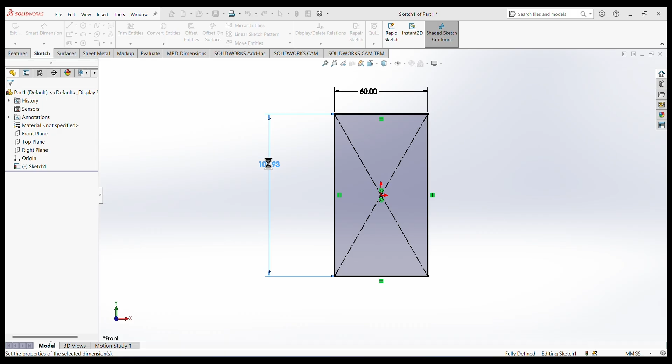Then assign the dimensions. This one is 60, enter. This one is 90, enter. Now we create the circles, two circles, and then assign the dimensions. First one is 30 millimeter dia, second one is 60 millimeter dia, enter.

Now we create the keyway. First we select the line and then create a random keyway just like this one. Okay, select. Now we assign the dimensions. First we make it horizontal. Okay, now we assign the dimensions. This is 8 millimeter, enter here. Okay, now we make it exact on the same axis.

Assign 0 dimension, enter. Okay, now the mid of this line and this center is exactly on the same axis. Now we assign the next dimension: from this point to this one is exactly 18 millimeter. Enter here. Okay. Now our keyway is ready. Now we can trim the remaining part. Okay.

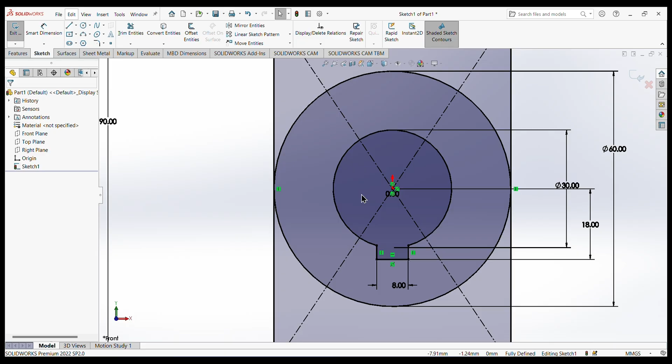Now look here. Our whole sketch is ready. Now we assign the extrude command and then extrude this face, and the dimension is 30 millimeter. Enter here. Okay. Now look here.

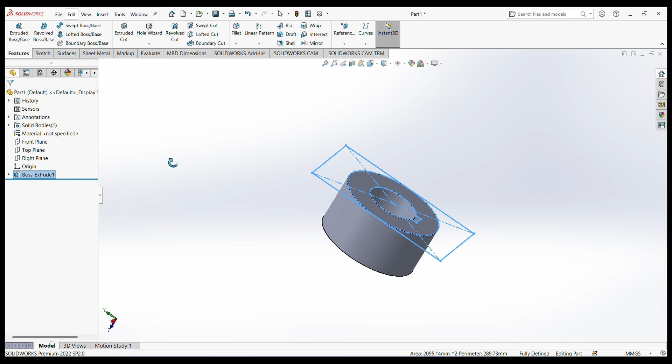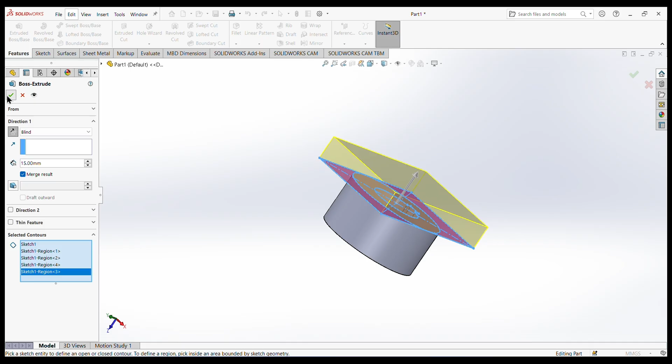Okay. Now we can make the extrude rectangle sketch. Select the sketch, extrude, reverse direction, assign the dimension 15 millimeter. Enter here. Also select this face and this one millimeter. Okay. Now look here. Our bottom part is ready.

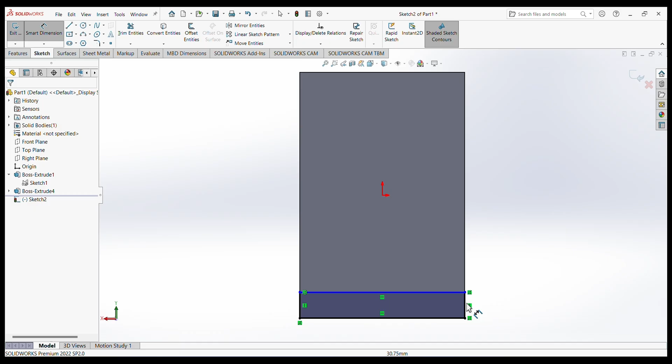Now we are going forward and select this one for sketch. Okay. Now we create a line from this one to this one. Make full rectangle. Okay. Now we assign the dimensions. This one is 15 millimeter. Okay. And this one is 60.

Okay. Now we assign the extrude command. Okay. And how many? That is 43. 43. Enter here. Okay.

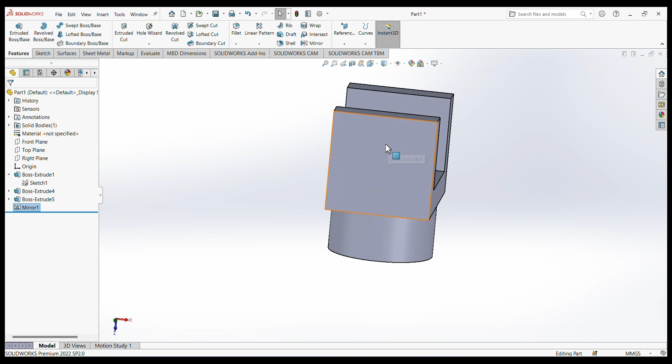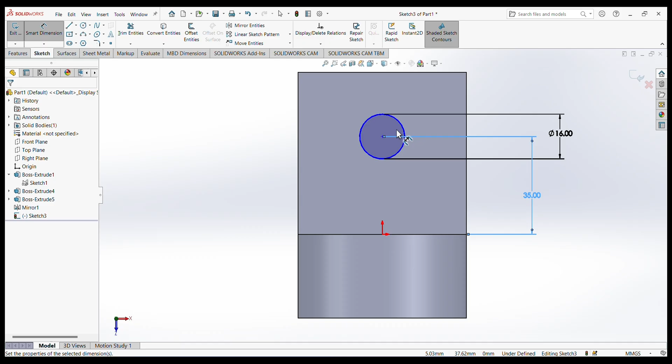Okay. Now simply going to the SolidWorks page and then ready for sketch. Make the hole. Okay. Assign the dimensions: 16 millimeter dia, and from this point to this one is 35. Enter. Okay. Now going to feature extrude cut command, going to through all both. Okay. Now look here. The hole is ready.

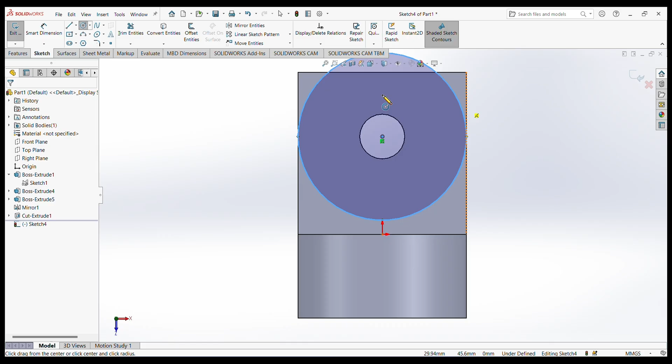Now we can go again for sketch and then make the circle again at the center of this point, this circle, sorry. Okay. Assign the dimension. This circle is exactly 23 radius and then 46 is the dia.

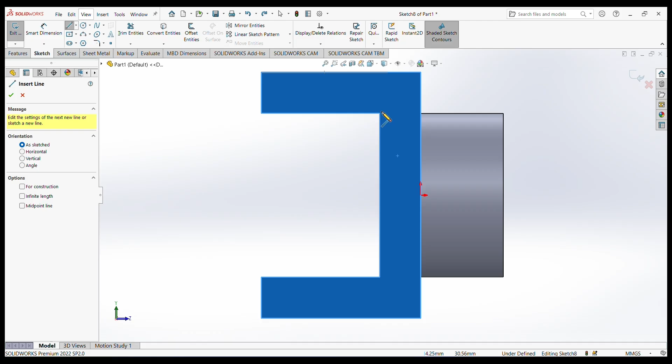Okay, select. Now select this face for sketch. We can use this top plane for sketch. Select this face for sketch. Okay, now we make the line again from this point to this one.

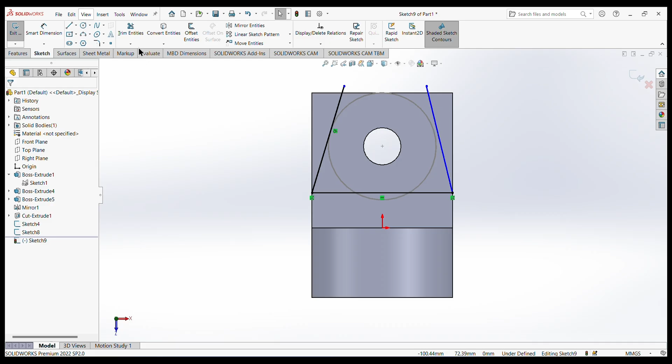Select line from this point to randomly this one. Okay, then create the tangent of this line to this circle. Now look here, tangent. Okay, now simply we are going to features, use extrude cut command, select this face, this area, this, and also this one. Okay, now look here, through all both. Okay.

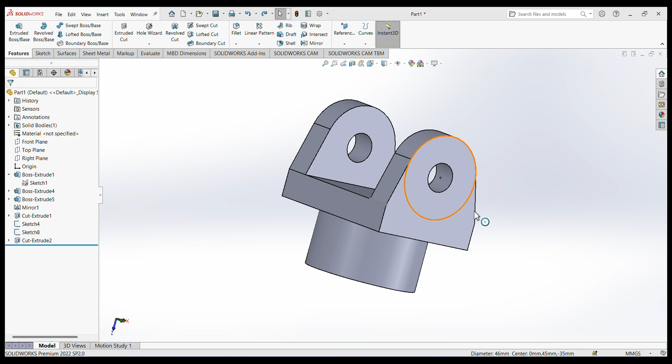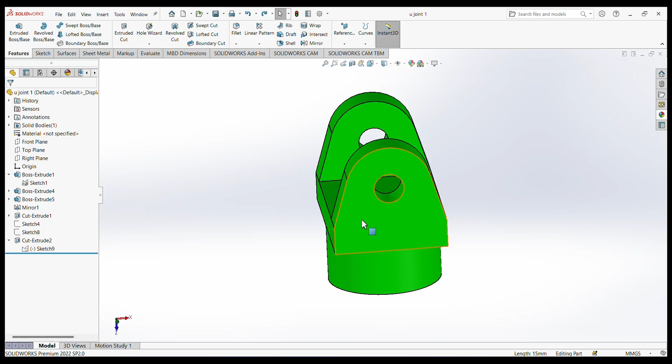And then assign the color as you want, just like green color. Okay, now we can go to save it, save as, assign the U joint 1, enter. Okay, now we are going to the next part, and that is number 2, bearing cross. Now the bearing cross is this one.

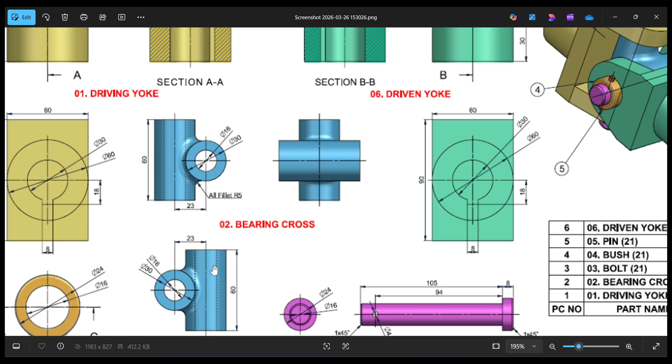We are going to the SolidWorks page, create new file, part. Okay, now select the front plane for sketch, create the circles, 2 circles, and then assign the dimensions.

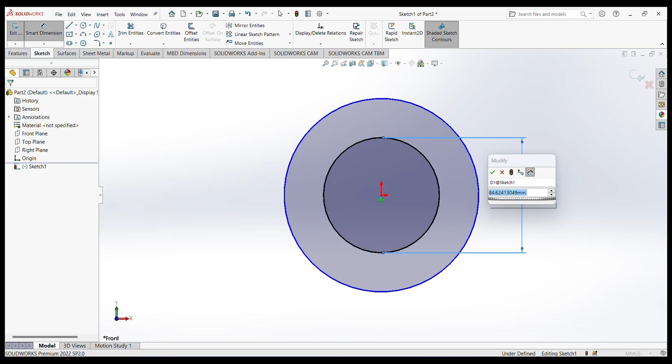This one is 16 millimeter dia, enter. This one is 30 millimeter dia, enter. Okay, now we assign the extrusion, that is 60 millimeter, enter. Okay, now the one bearing is ready.

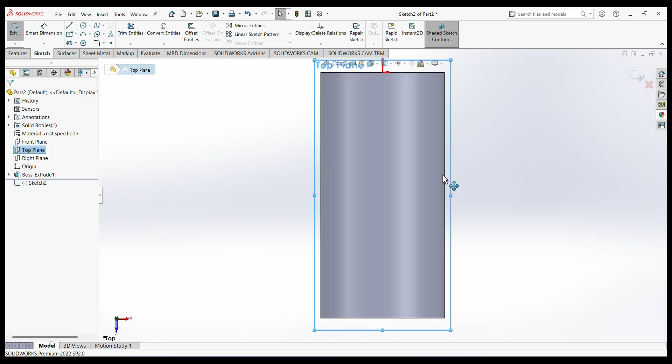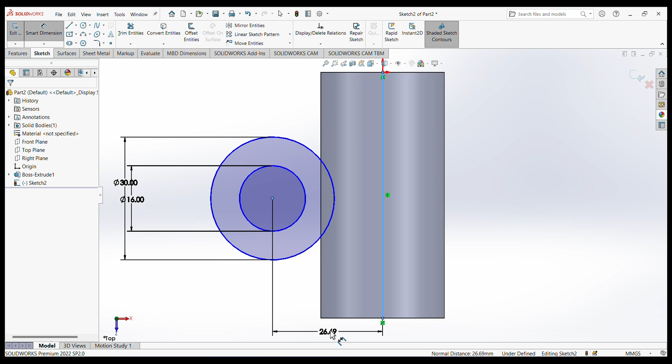Now we select the top plane for sketch. Okay, now we create the circle at this point randomly, make 2 circles, and then assign the dimension. This one is 16, enter. This one is 30, enter. Okay, now we assign the dimension from this center to this center line. First we create the line that passes to the axis of the origin of this bearing. Okay, now we create the dimension from this point to this line is exact 23, enter.

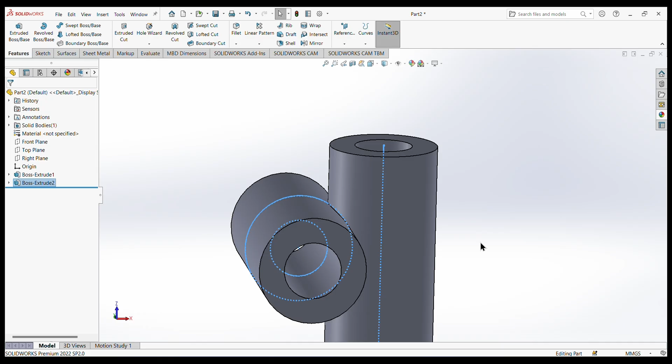Okay students, now look here. Now we are going to the feature, use extrude boss command and assign the dimension and make it mid plane. Okay, now look here, our bearing is ready. Now we are just applying the fillet, going to fillet command and select this option, select this edge and then assign the radius 5. Okay, now look here, the bearing is ready.

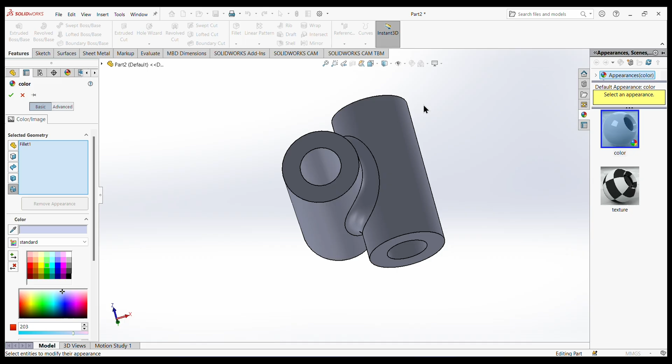Okay students, now we are just going to assign the color just like this one. Now look here, if you assign this one, I think this one is better. Okay students, this is our bearing cross. Now we can save it, save as U joint 2, enter.

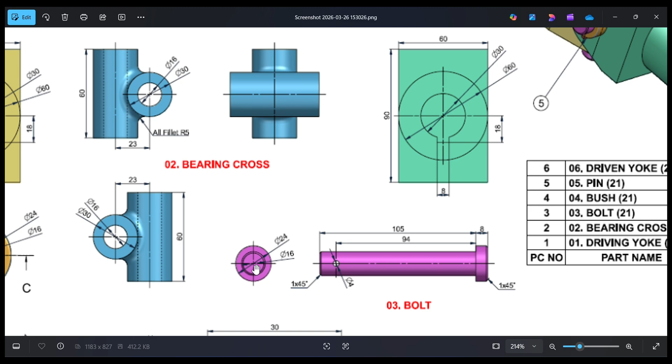Now we are going to the next part, and the third one is bolt. If you look here, the bolt, its dimension is, the head of bolt is 8 millimeter, the tail of bolt is 105 millimeter length. Now if you look here, there is the circle on the tail that is 4 millimeter dia, and the chamfer on both ends that is 1 cross 45-degree angle. If you look, the circle of the head of the bolt is 24 millimeter dia and the tail circle diameter is 16 millimeter dia. Now we are simply going to the SolidWorks page and create new file, part.

Okay. Now first we create the sketch, front plane, ready for sketch, select the circle. Okay. Again circle, create. Okay. Now we are going to the dimensions. This one is 16, this one is 24. Enter. Okay. Now we assign the extrusion. This one is 105. Enter. Not using the mid plane. This is blind. Okay.

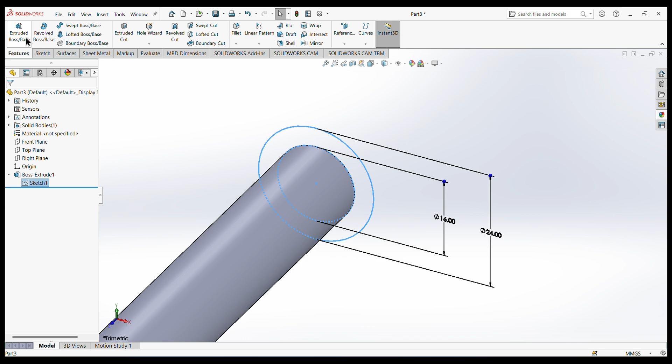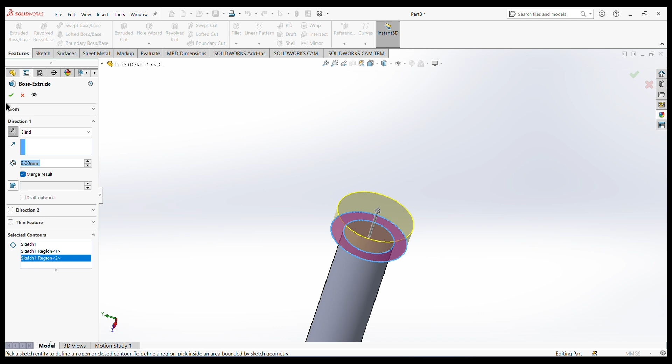And select the sketch. Extrude again. Select, use the reverse direction and select the selected contours. This one. Also this one. Okay. And the dimension is 8. Enter. Okay. Now look here, the bolt is ready.

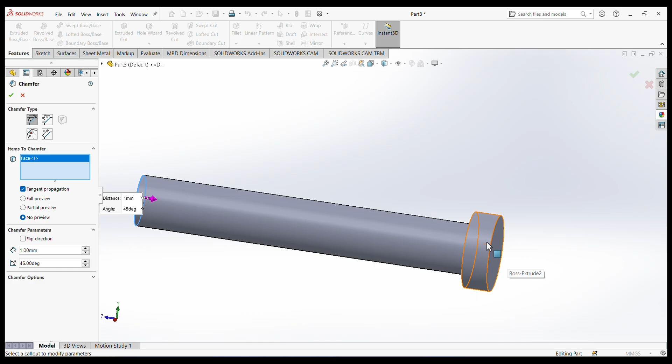Just assign the chamfer, chamfer command and then select the distance and angle. Distance is 1 millimeter and the angle is 45. Okay, select the edge, this one and this one. Okay, now look here, the chamfer is also ready.

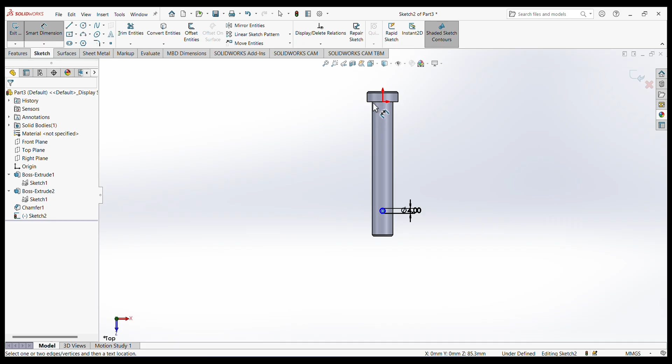Now we are going to the top plane sketch. Okay, create the circle. Okay, assign the dimension 4 millimeter dia. Enter. And then from this point to this one is 94. Enter. Okay, now we are simply going to feature extrude cut and select the through all both. Okay, now look here, our hole is ready.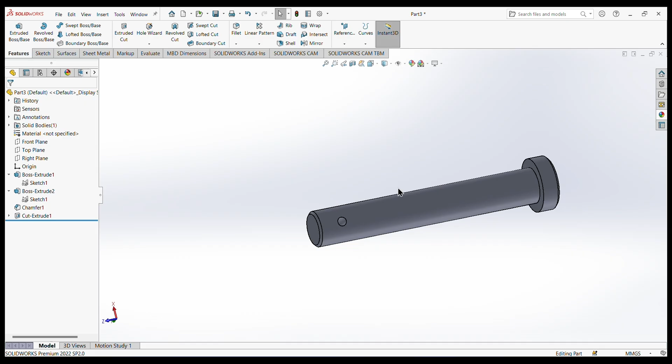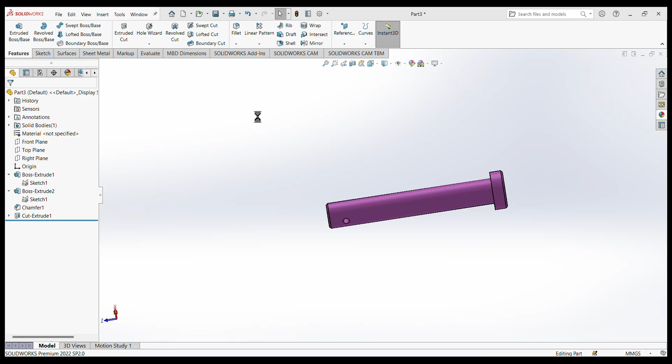Now we simply assign the color. Now select the whole bolt and assign the color. Just like this one or this one. Which one is better? I think this one is better. Okay, now we can save it, save as U joint 3, enter. Okay, now we are going to the next part, and the fourth one is bush.

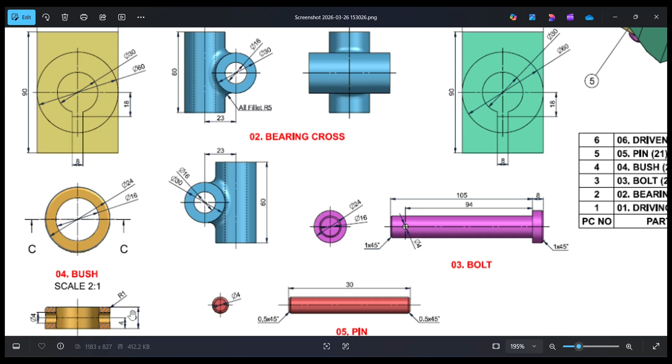If you look here, the bush dimension, that is two circles. First one is 16 millimeter dia and the next one is 24. And then if you look here, the section view of this bush, there is the hole of 4 millimeter dia that is made inside the bush, and the dimension of the center of this hole to the end of the bush is 4 millimeter and the total thickness of bush is 8.

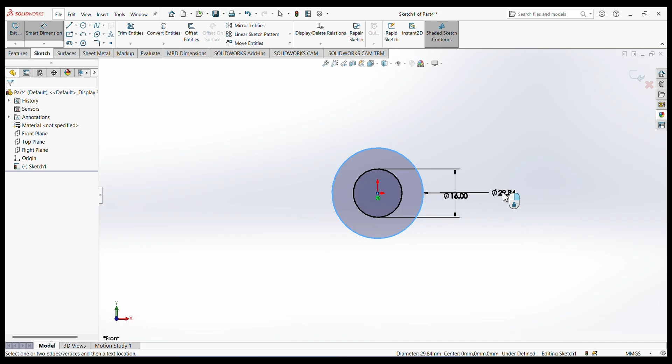Okay, now we are going to the SolidWorks page, create new file, part, okay, make sketch, front plane, ready for sketch, create two circles and then assign the dimensions. This one is 16, this one is 24. Now assign the extrusion, going to feature extrude, total is 8 millimeter thickness, enter here, okay.

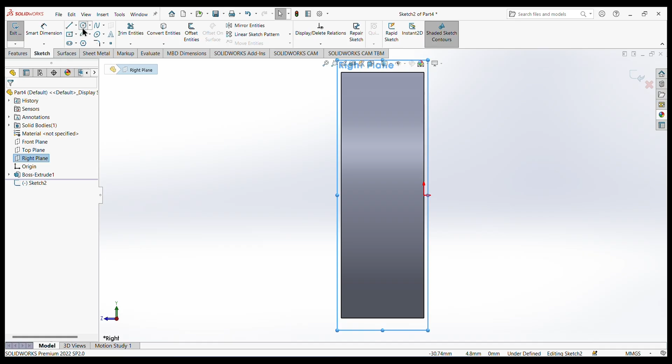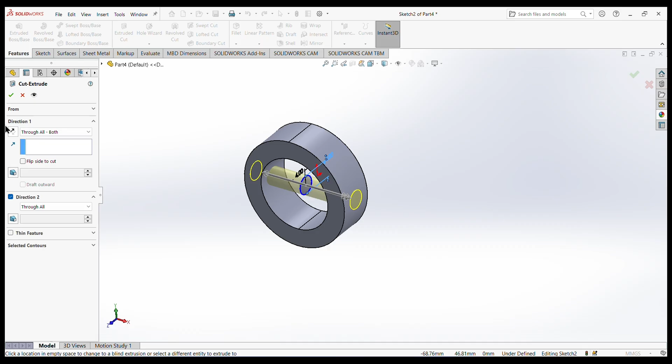Okay students, now select this face for sketch. First we select the right plane for sketch, okay, create the circle, okay, assign the dimension from this point to this one is 4, enter, and the circle is already 4 millimeter dia, okay. Going to feature extrude cut, select the through all both, okay. Now look here, okay students.

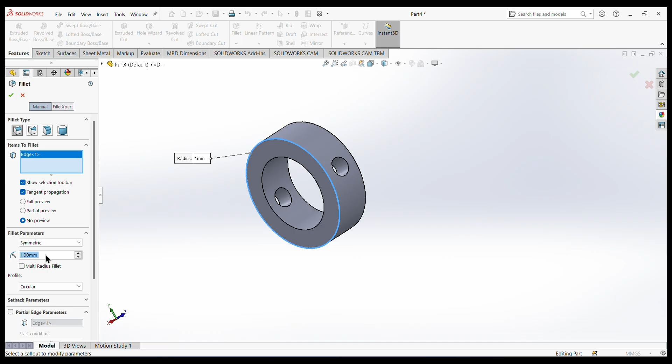Now if you look here, one thing is remaining, that is the fillet at one end and its radius is 1, okay. Going to SolidWorks page, apply fillet and select the one edge and 1 millimeter radius, okay. Now look here, our whole part is ready. Now we are simply going to solid.

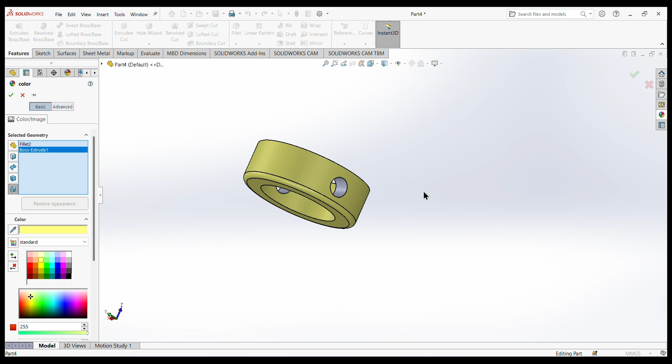Now we assign the color, that is whole body, okay. Select also this face, okay. Now look here, the bush is ready. Now we can save it, save as U joint 4, enter, okay. Now we can go to the next part, and that is the fifth one, pin.

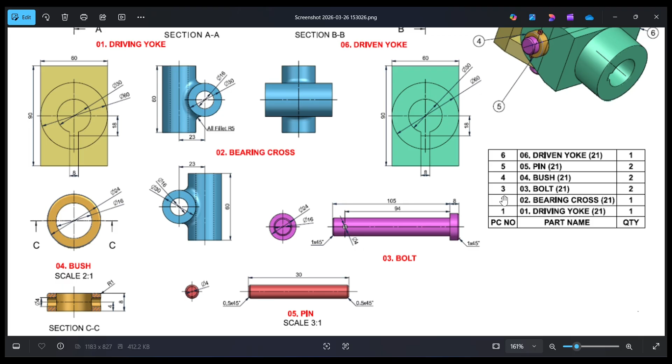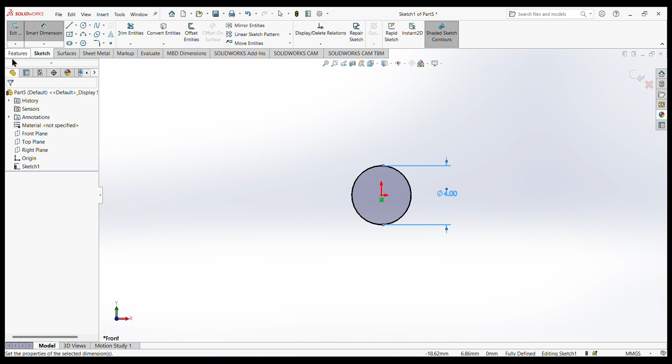The pin is so simple, just a simple rod type shape whose length is 30 millimeter and 4 millimeter dia, and the edge chamfer is 0.5 cross 45 degree, okay. Going to SolidWorks page, create new file, part, okay. Select front plane for sketch, create circle, assign dimensions 4 millimeter dia, enter, using extrude command, assign the dimension 30, enter, okay.

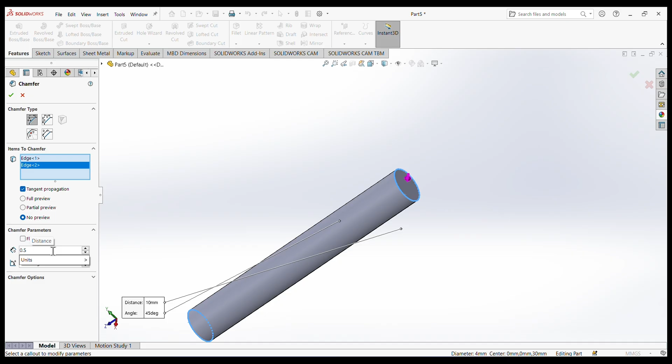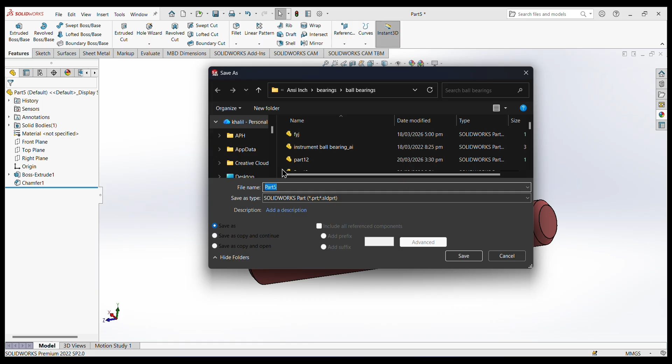Now select the chamfer command, select both edges, assign the distance 0.5, enter, and 45 angle, okay. Okay students, our rod, means pin, is ready. Now we simply assign the color to the whole face, okay. We can save it, save as U joint 5, enter, okay. Now we are going to the next part, that is sixth one, driven yoke again.

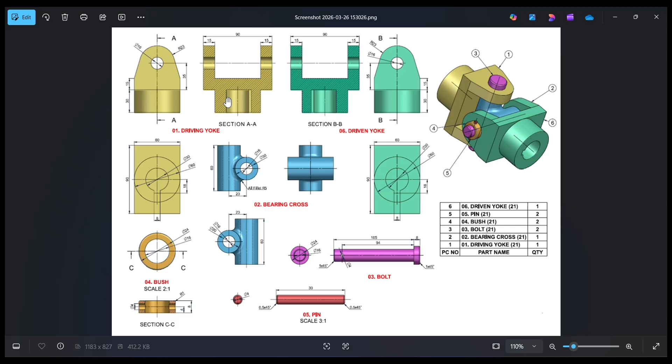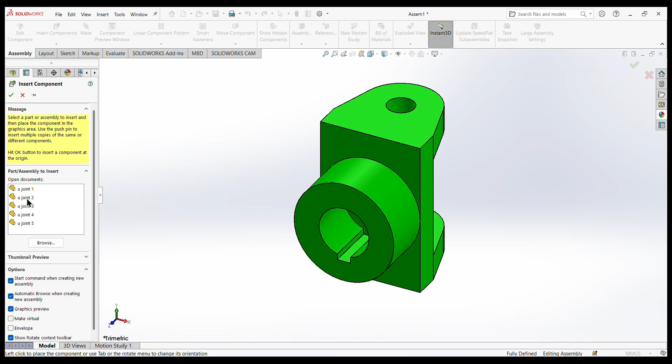Select assembly. Okay, now we can insert the first part. Now look here, enter, then again insert the first part, select the tab again. Okay, and then rotate y axis, y, this one. Okay, enter here.

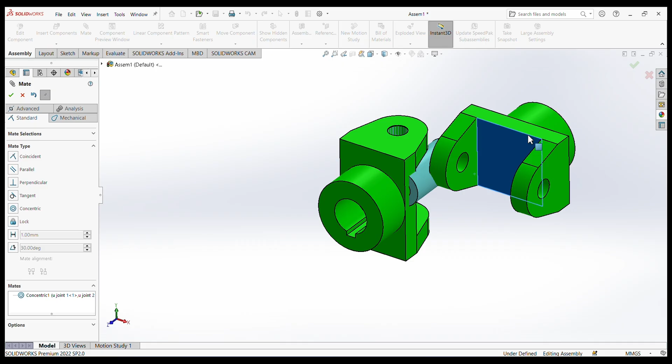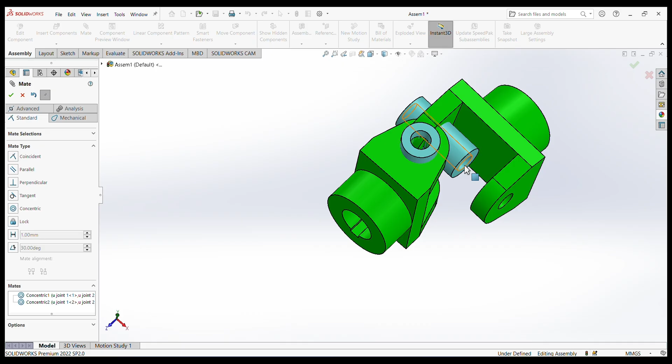Okay students, now we insert the next one, bearing cross, insert this one. Okay, now we can use the mate. First we use the concentric command, select this one and this one. Okay, now if you look here, this one. Now we can use again concentric command, select this one and this one. Okay, now we can use the coincident command, select this face and this one. Okay, now we can again use the coincident command, select this face and this one.

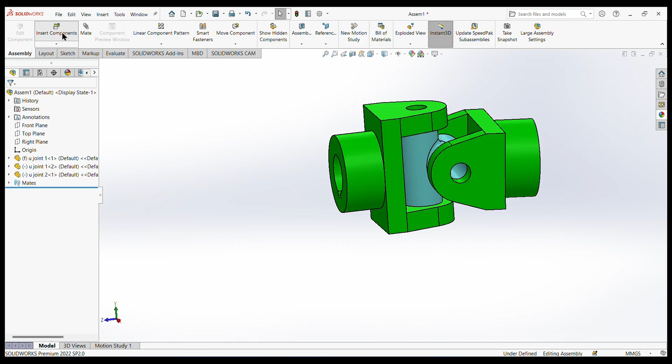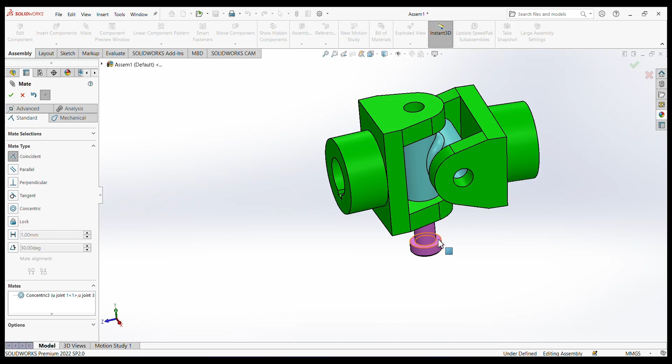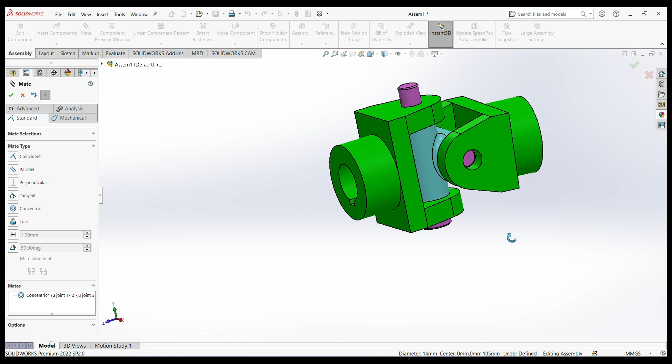Okay students, now we are going forward and insert the next component, and this one is bolt. We can make it concentric first, use concentric command, select this one and this one. Okay, we can move it upward, use the coincident command, select this face with this one. Okay, now we insert again the bolt. Select the mate commands and then use concentric, select this face with this one. Now we can use the coincident command, select this face with this one.

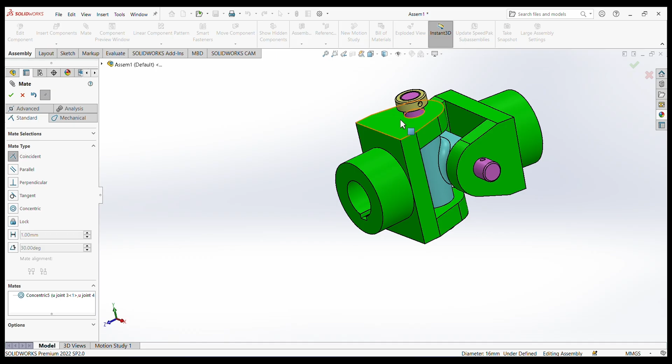Okay, now we can insert the next component, and that is bush. We can use the tab button and then rotate x-axis again. No, okay. We can use mate commands, select concentric, select this face with this one. Okay, use coincident command, select this face with this face. Okay, again we can insert the bush.

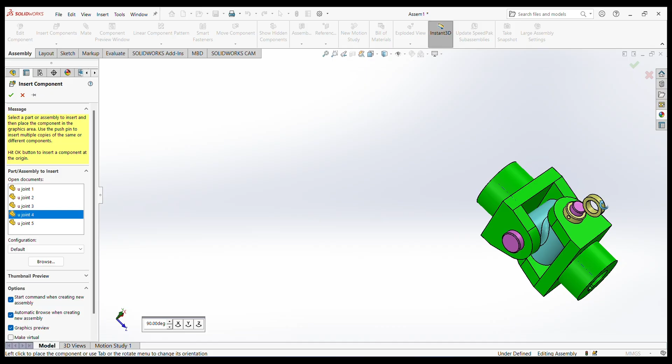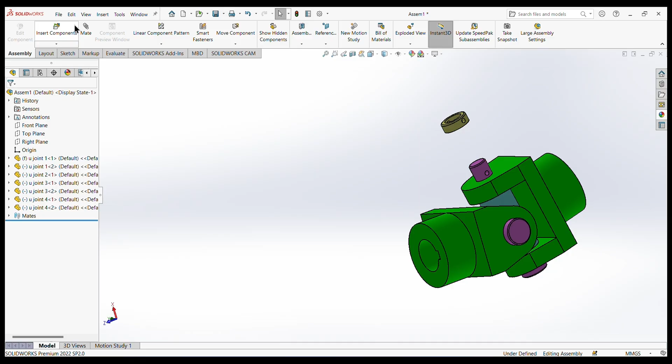Okay, now we can press the tab and y-axis. Okay, first we place it. Then we use the mate commands, select the concentric, select this one and this circle. Okay, now we can move it outward, and then again use the mate command. Select the coincident, select this face and this face.

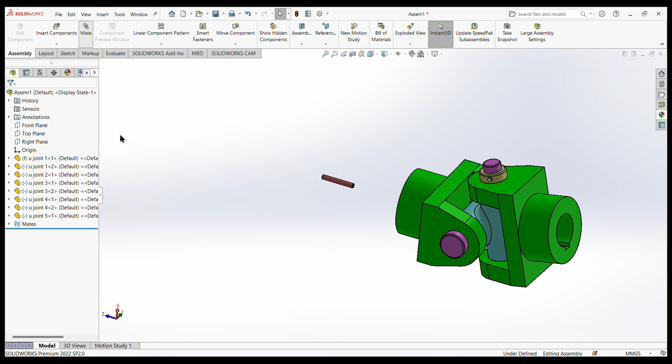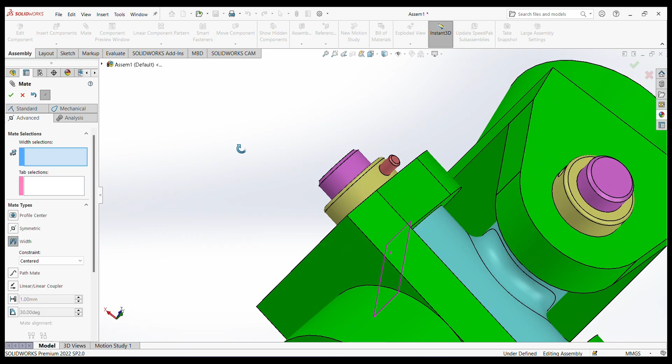Okay, now look here. One thing is remaining, that is rod, means pin. Insert component. Now we can use the mate commands. Use concentric, select this face, this circle, make concentric with this one. Okay, now we make it in exact center. Use the advanced width, and then select this face, this face and this one. Okay, now look here, it is in the exact center of the bush.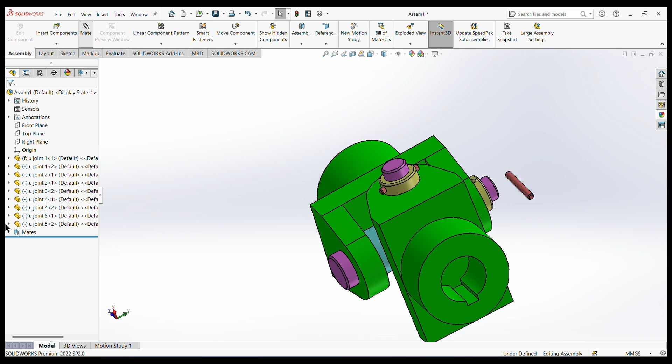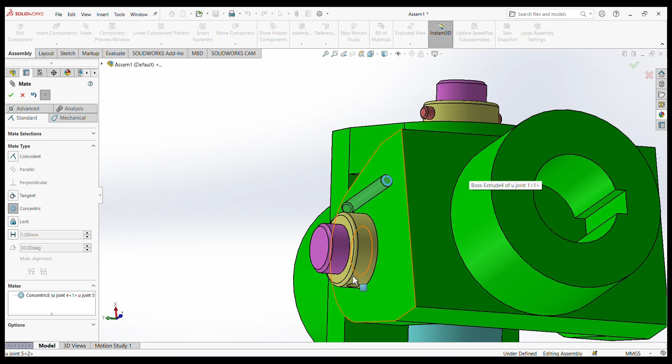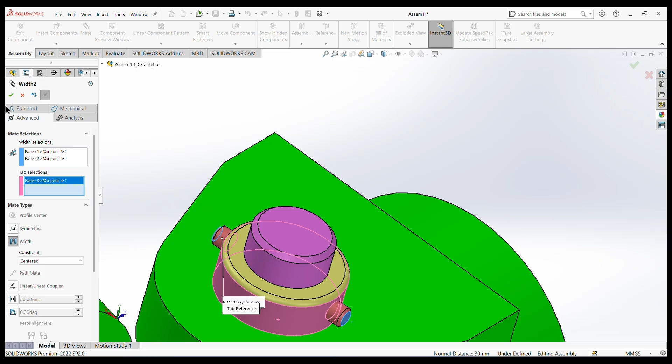Now we can insert again the pin. Use the mate commands, concentric first, make this one with this one concentric, and then again use concentric, select this one with this one. Okay, now look here, these are movable. We use again the width command, going to advanced, select the width command and select this face and this face and select this circle. Okay, now look here, our whole universal joint assembly is created.

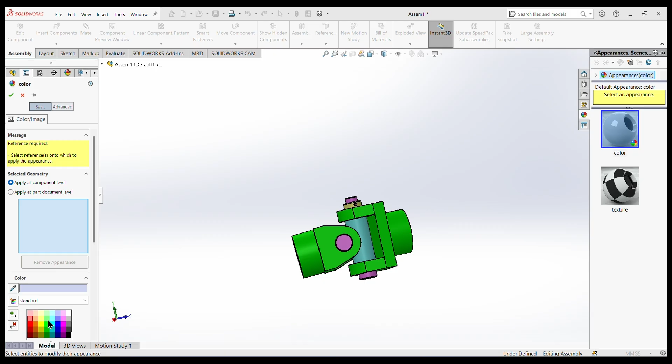Now one thing is remaining, we assign this part a different color. Going to color command, assign the color to this part. Select the yellowish color, select this face. Okay, it makes it different. Okay students, so this is our today's assembly. I hope you understood it, and you will be able to create this assembly on your own SolidWorks page. This is our universal joint.